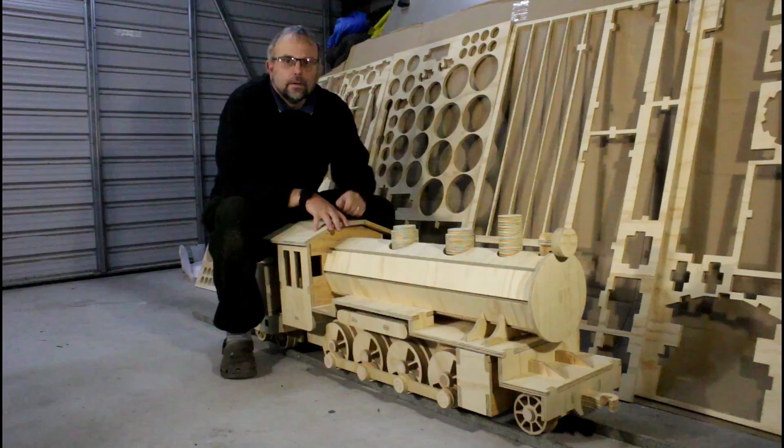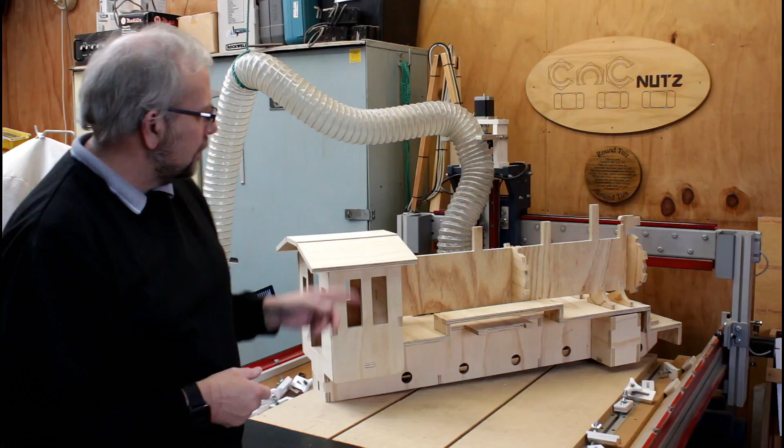This week's project is last week's project. We're going to continue cutting the remaining parts out for our model train here. I also want to take a bit of time to address some of the questions left in the comments section on the last video concerning the building of the train, and then I also want to show how I made the toolpaths for it and did that 180-degree flip of the material to make the most efficient use of my stock. So it's about time we cleared the table down here, put some stock on the table and started some cutting.

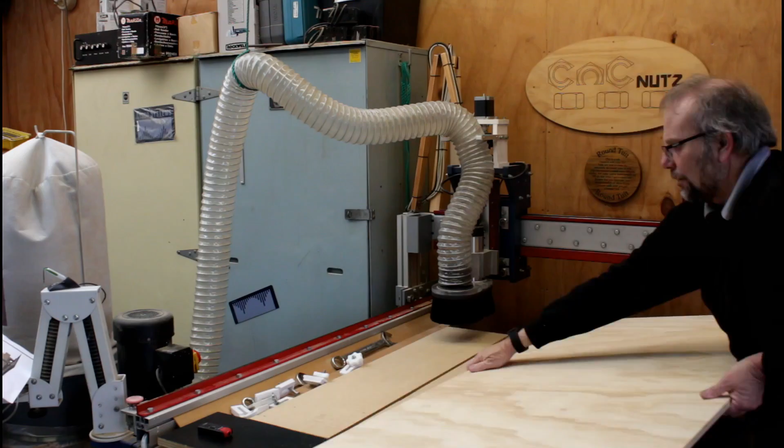So the most common question I've been asked so far on YouTube, Facebook and by email is what sort of cutter I'm using to get the good finish on my parts when cutting plywood. And here it is here. It's a 1/8 inch single flute down cutting spiral bit. When cutting plywood, it's important that you do use a down cutting spiral bit.

When these cutters run, they push the chips into the material at the same time slicing the fibers at the top of the plywood. Your usual up cutting spiral bit, what that does is it pulls the chips out of the slot, which is good for clearing the slot, but it also pulls the fibers up at the top of the plywood, which causes quite horrendous chip out at times.

Now here's a piece that I've cut, and this hasn't been sanded yet. This is it as it is off the table, and there's the smallest amount of furriness there if you want to be picky. The back of it looks perfectly fine as well. There's no chip out on the back of this material either.

So a down cutting spiral bit tends to push the fibers through the back of the plywood, but because it's sitting against the table, it doesn't cause that chip out that you normally see by using an upcutting bit at the top of the material.

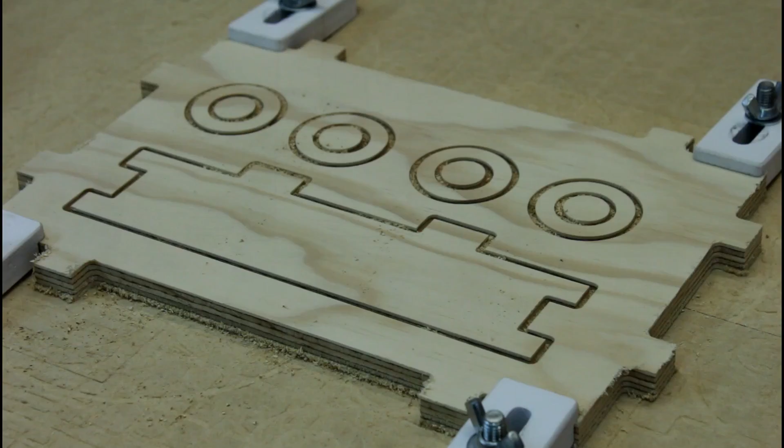Now I traced this down to the fact that the cutter had actually dulled over the course of my cutting. This isn't surprising given that I've been using this cutter for months before I even started this project. I did a test cut using a new cutter, and as you can see here, the results are much different. All these bits are nice and crisply cut at the top. They require no sanding. So it's not surprising that my older cutter had dulled a little bit. It's only to be expected.

So the other question is, why did I use a 1/8 inch bit rather than a quarter when cutting the plywood? A quarter would have cut this out so much quicker. And the answer is it's because of these slots here in the project. Because these have to fit like this into there, these corners here, if I used a large cutter, would have large radiuses on them. The upshot is they just wouldn't fit together very well.

By using the smallest possible cutter that's reasonable for the project, I get these sharper corners in here, and so everything's going to fit together better. I found 3mm to be the best option for me.

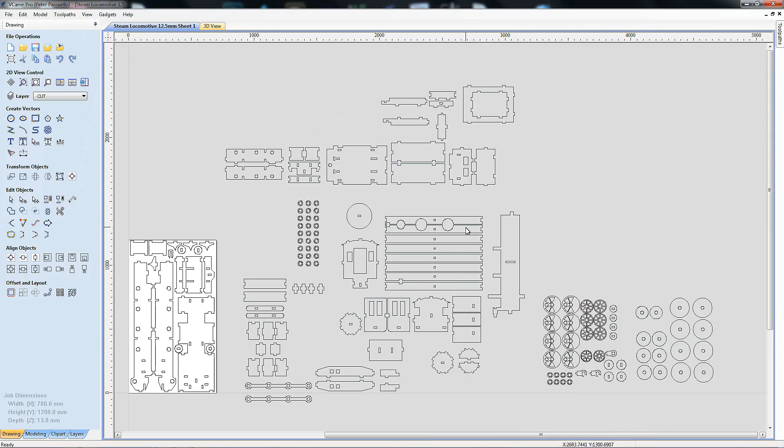So here are all the components I need to make my train. I've already scaled the drawing as I showed in last week's episode, and the first thing I need to do with the drawing is select all the components here and come over here to join open vectors and have a check.

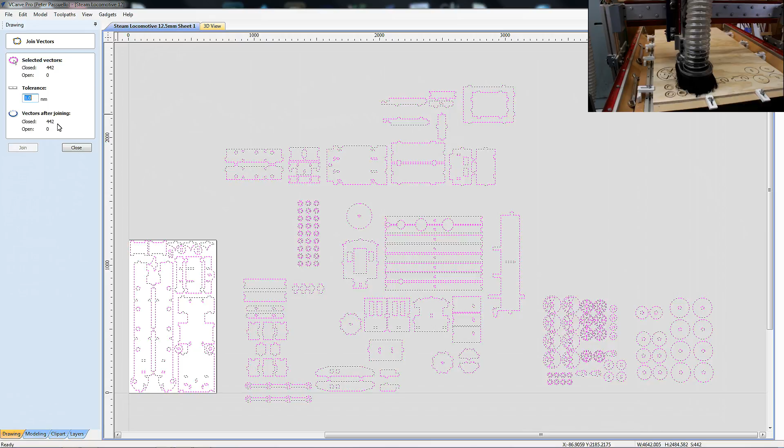I can see that I've got 442 closed vectors here, so I don't need to worry about that particular aspect of it. If they weren't closed, I would need to make sure that I went through and closed everything before I started. Whenever dealing with a file that you didn't create, it's always a good policy to go through and make sure that everything is closed.

I'm also going to select this section of components here, go Control C to copy them, Control V to paste a copy of them there, and then I'm just going to move them up here, because these components here are meant to be made with material that's twice as thick as the rest of them. Since I don't have any inch thick plywood, I'm simply going to cut 2 lots of them and glue them together. After all, that's what plywood is anyway.

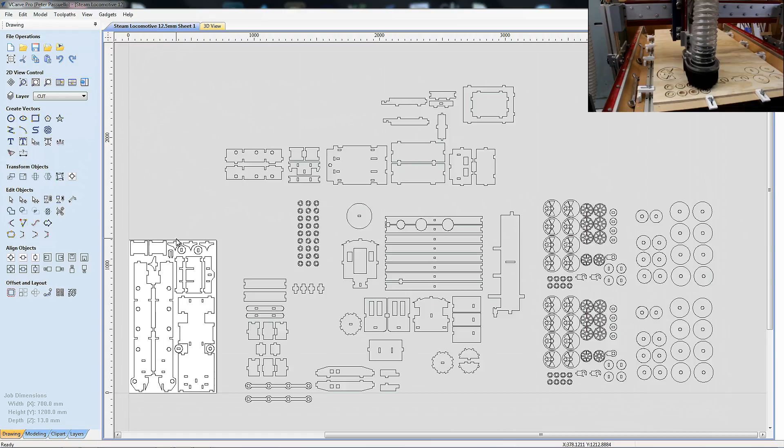Now the next thing I've got here is I've gone through and I've created my material size, 700 wide by 1200 long. So basically I'm just cutting my sheet 700 wide and keeping the full length of it, even though I cannot cut a piece of stock that big on my table. I can only cut to just over 1 meter in length. Now fortunately, this here, which is the longest piece in the puzzle, is only just a fraction over 1 meter in length, so I will be able to cut that in one piece. That saves me from having to tile this project.

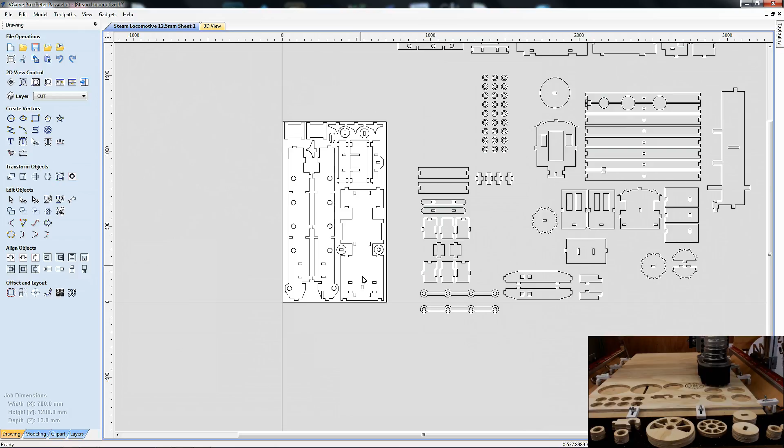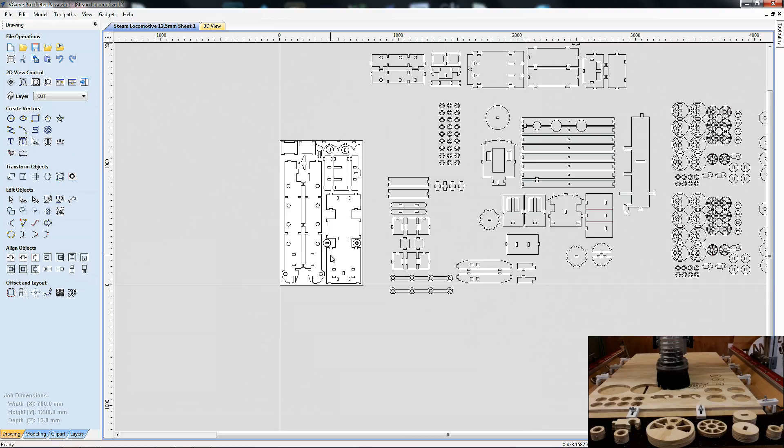Now next what I've done is I've gone through and I've put the pieces that I want onto my cutting area here. So I've taken these components here and simply dragged them off this area and onto my sheet, basically wherever I think they will fit. This way I get to cut the components I want. In this case, this is the start of the train, the bottom carriage setup, which I want those components first. Then I'll select some of the others and build on that. I could use VCarve Pro nesting, but I find that doesn't work very well in my opinion. So I prefer to do this sort of thing manually.

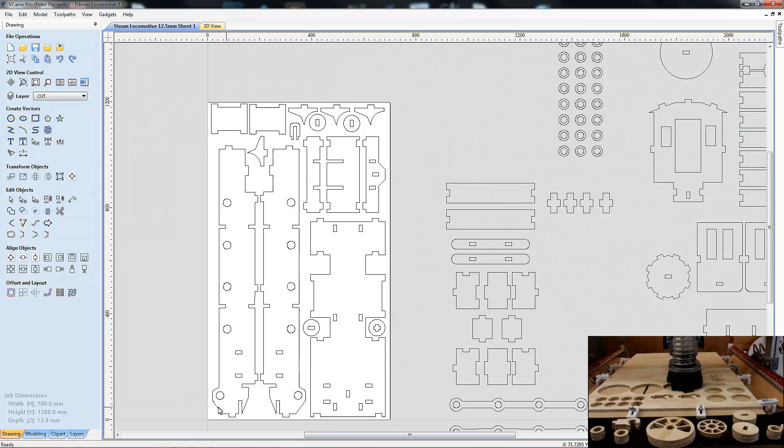Now having these components laid out here, you'll note that not only have I gone up to my just over 1 meter in length, I've gone beyond there and put more components onto this sheet. So if I reduce the size of my cutting area to the actual cutting area of my table, you can see I can cut these pieces here fine, but I can't cut these ones or these ones here. But for efficient usage of my stock, I'm going to lay out the board as if I could cut the whole thing in one pass. Now all I have to do is select the parts that I can cut, which will be these ones here.

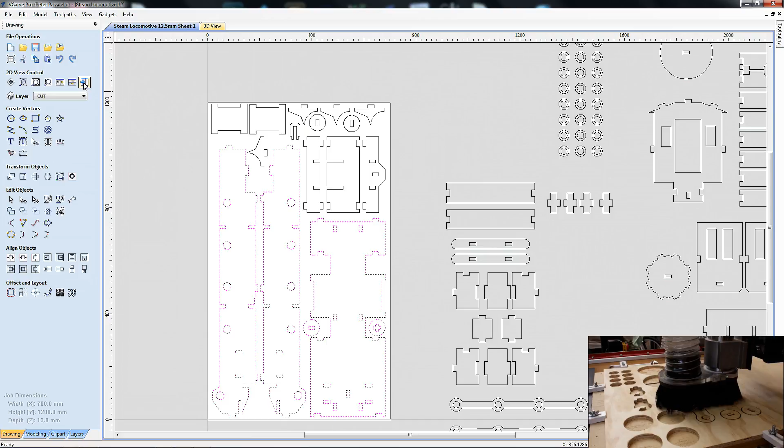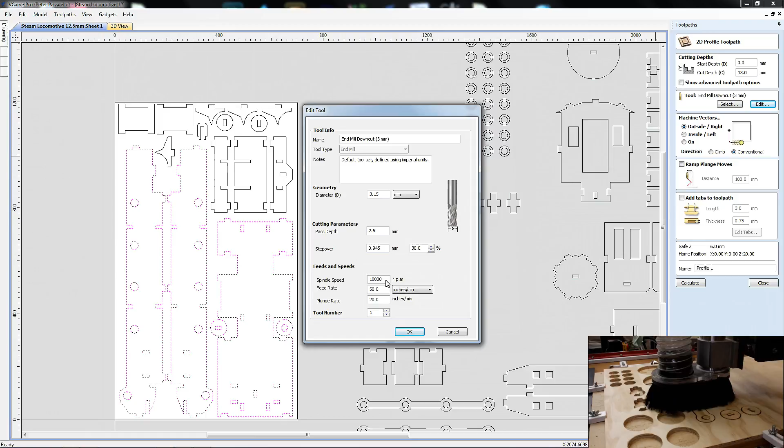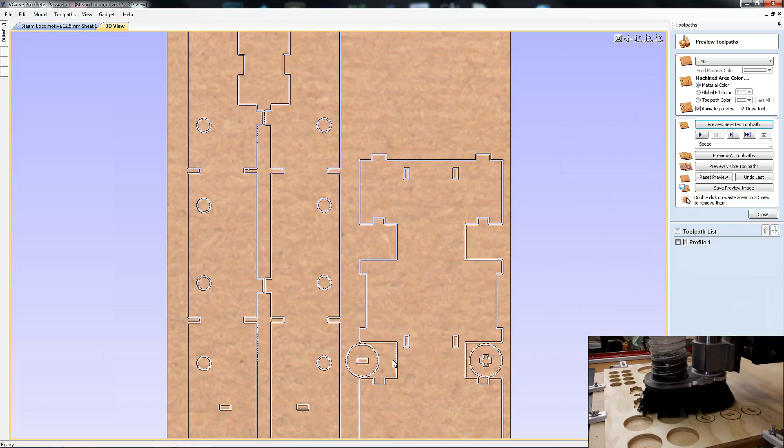I can now create a toolpath for them. This is basically just going to be a profile toolpath. I'll use my 3mm or 1/8 inch down cutting spiral bit. I'm going to set my feed rate to 50 inches a minute and my spindle speed at 10,000 RPM. I'll be taking a 2.5mm cut per pass. I will calculate this, and there it is. There's my toolpaths. Now these look a little bit close, but if I zoom in and go preview selected toolpath, you can see that I will not be interfering with the other components, so I'm fine there. Okay, that's the first toolpath done, and I'm going to call this sheet 1, cut 1.

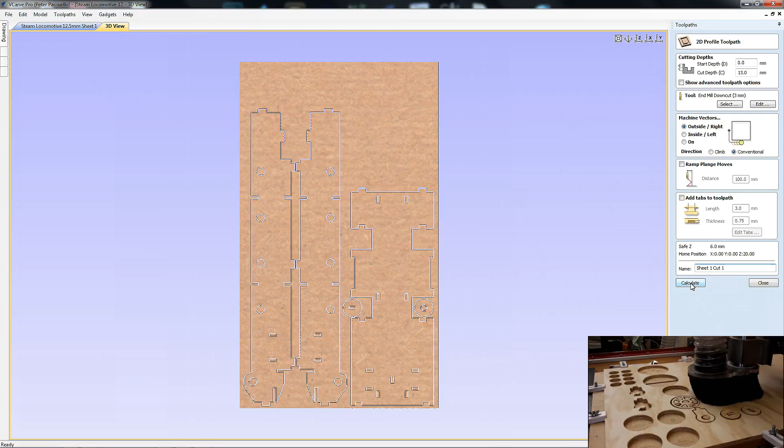Okay, so now I'm left with these parts here to cut, the ones that are missing from the sheet. So I'm just going to hold down the shift key and select the entire board here, and you'll see what that does is it selects the other pieces and unselects the original set that were selected. And I'm just going to go create a new toolpath, a new profile, down cutting spiral bit, outside pass. I'm going to call this sheet 1, cut 2. And I'll just calculate that for the second.

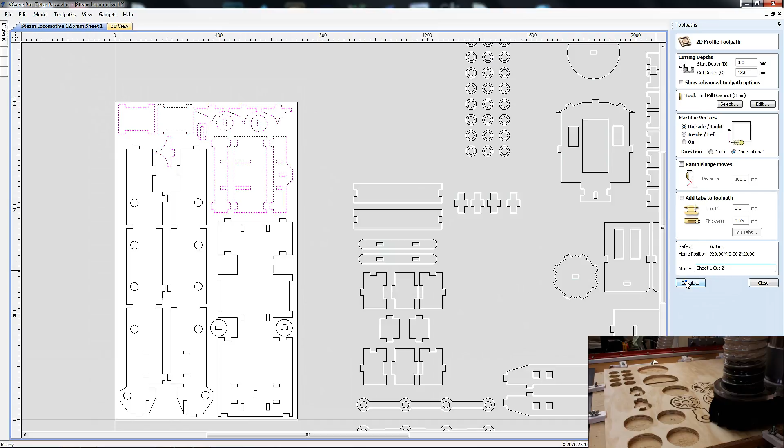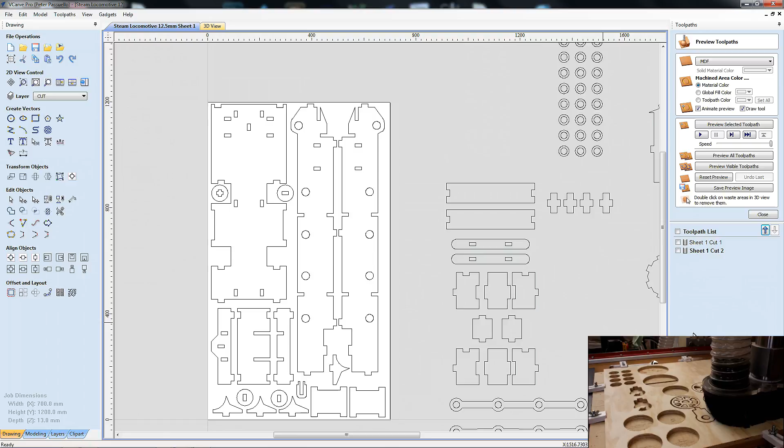But the problem is, that's not how I'm going to cut it. I'm going to select the whole thing here, come over here, and go rotate. I'm going to rotate it 180 degrees. I've done that. Come back over here to cut 2 and go calculate. Okay, you can see now it's going to cut these here at the bottom of the sheet. I'll just reset the preview. So you'll find that if you do enable the original cut 1, the two cuts overlap. So after I've done the first cut, I'm going to rotate the sheet 180 degrees, put it back on the table, and cut the second toolpath there.

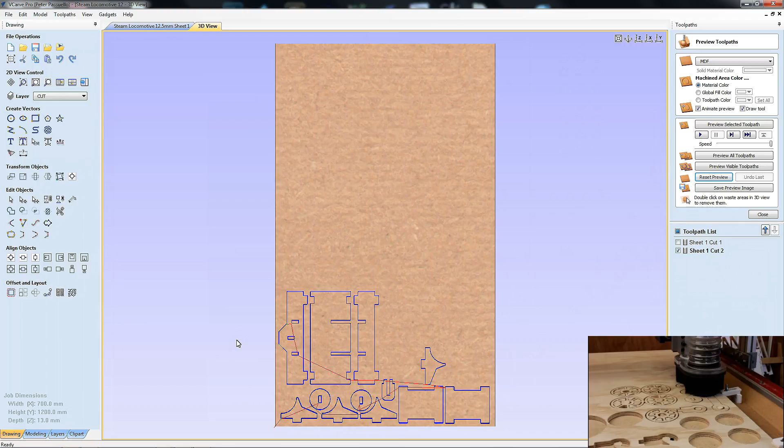This gives me full usage of my material, and I don't have to use a tiling toolpath. Again, it is important that you do a preview so that you can see if you have any overlapping cuts, and I don't, so I've got those spaced nicely.

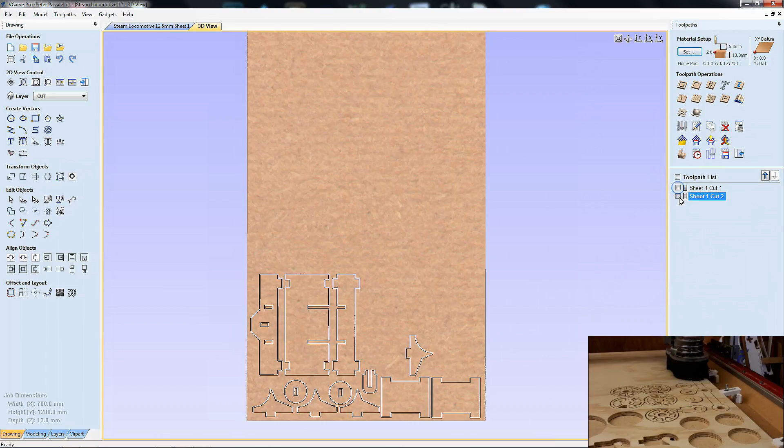It just simply becomes a matter of saving these two toolpaths, and you need to save them as separate toolpaths. So just go save toolpath, save the first one, then select the second one, save toolpath, save that as a completely separate file. And that's the secret to doing a 180 degree rotation of your stock to make the most efficient use of your material.

Well, there's no doubt about it. I think I must have been asleep when I made the toolpaths for these 3 wheels. Never mind, I'll cut them apart on the bandsaw.

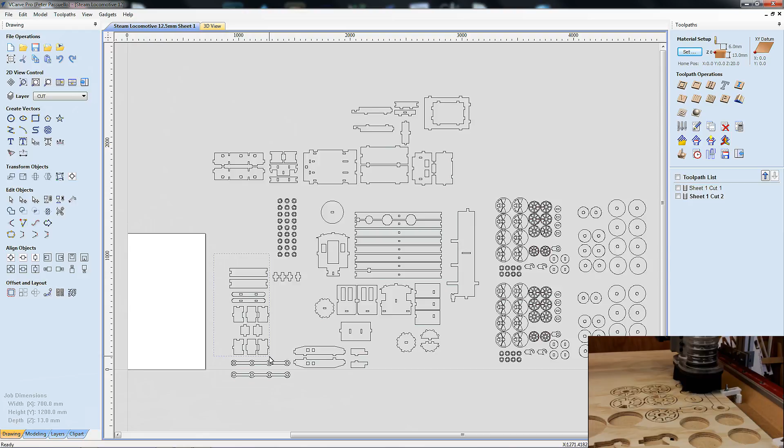Now, at the conclusion of making these files, save it. I saved it as sheet 1, and then come down here and delete these components. They've already been made. We can now start putting more components onto our board here and laying it out. And we'll be calling this sheet 2. Need to bring these components in, rotate them as necessary, and put them onto the sheet.

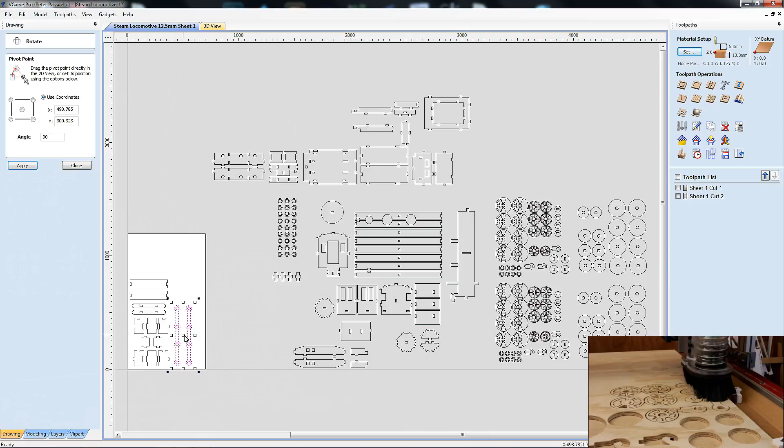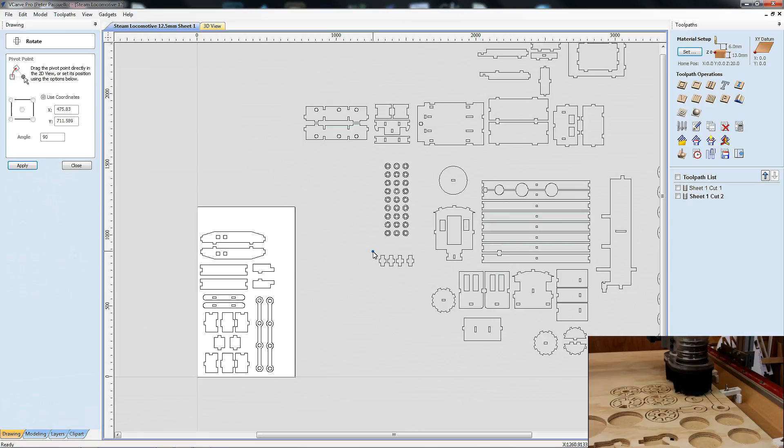Position them so that you get appropriate spacing between them. You don't want them too close to one another. Try and get your spacing right. You can pick and choose which parts you want so that you can get the parts you need to start building it as it's going. That way you start seeing a result as you're putting it together.

So just work your way through like this here, just selecting those parts. Just make sure you grab not only the outside but the internals of them as well. If they've got holes in them, make sure those holes don't move anywhere, and just take your time, lay them out. I'll just delete these here.

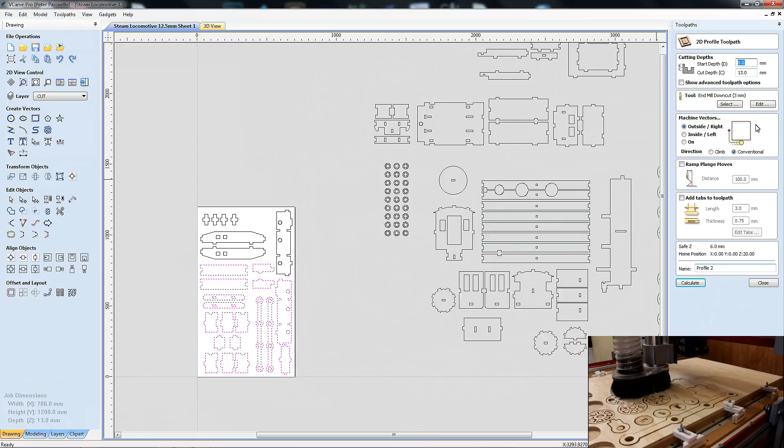And then once I've got the sheet pieces on the sheet here, then I can start making toolpaths for them. Now again, I'm only going to probably lay out these ones here first. I'll just go create a toolpath. There's my 3mm bit, or 1/8 inch bit I should say. I'm going to call this sheet 2, cut 1, calculate that.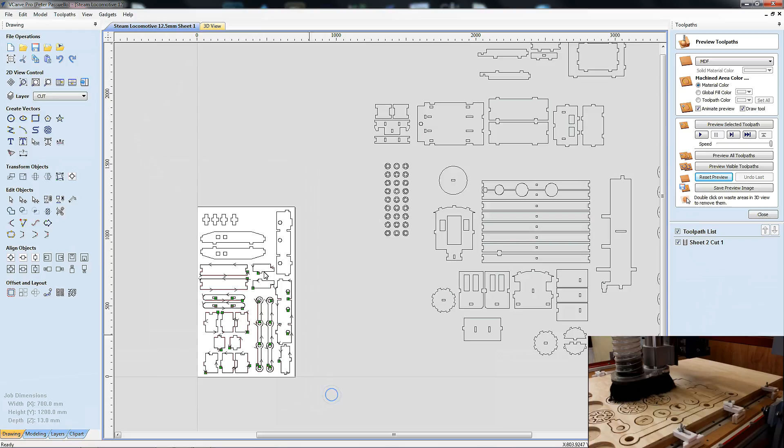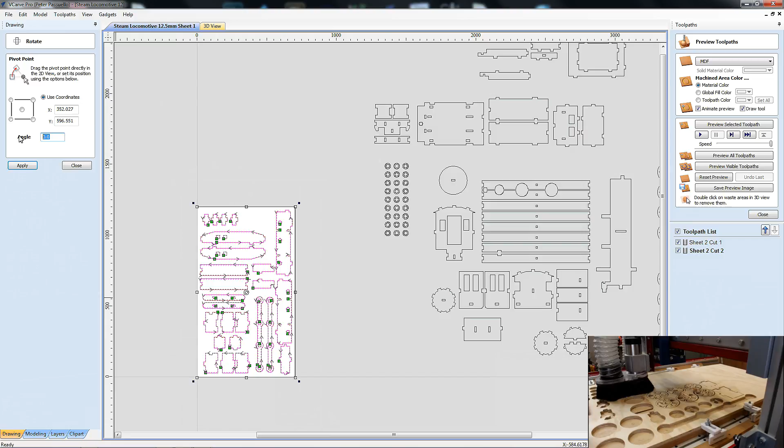So there's my first set of components. I'll just then hold down the shift key, grab it like so. That selects these ones here. I will create a new one, sheet 2, cut 2, calculate that, then come over here, just grab the lot, rotate it 180 degrees. I'll just unclick those there. Okay, now just grab sheet 2, cut 2, and just calculate that, and you're done.

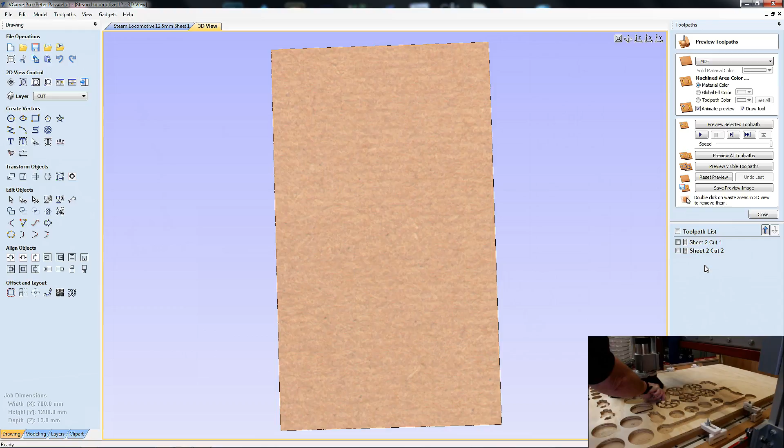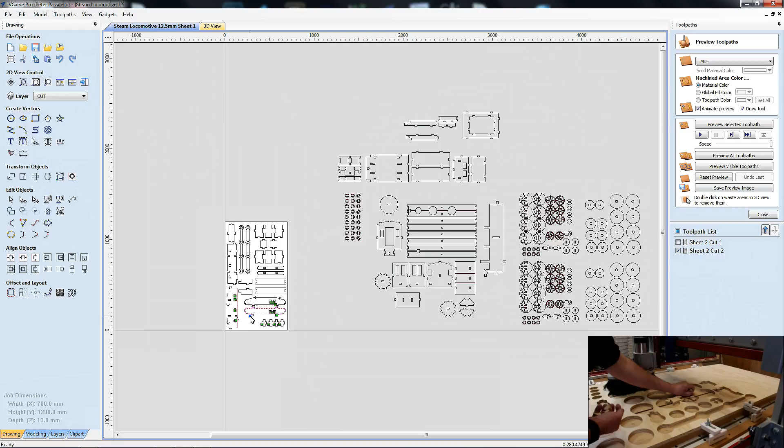Save each of these files individually, and once that's done, again, save this as sheet 2, delete these parts, and keep going until all these parts on this side here have been cut up, ready to go. Now, one of the things you'll notice is I'm not using holding tabs. There's a reason for that, and I'll go into that in my next episode. However, if you do wish to use holding tabs, and it's not a stupid idea, then simply put the holding tabs on here as necessary before saving your files.

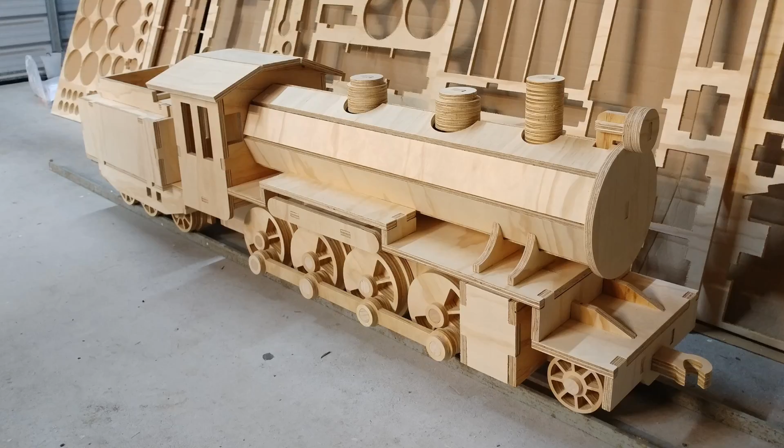Well, there we have it, the finished train, and isn't it a beauty? 1.7 metres long, that's just over 5.5 feet. And I'm really pleased to see that the carriage here at the back is actually articulated. It's held to the train via a pin linkage, so that's going to make it easier to connect and disconnect for storage, as well as give it the best chance of being able to be motorised to run around my brother's front yard. Now, I won't be following up on that particular part of the project. I'll leave him to sort out the finer details on that. But if we get it working, I'll put a video up of the train running on a track.

Well, that basically rounds up this week's project. I hope you've enjoyed it as much as I have. I was really surprised how well this thing went together, how easy it was to make, and how much I ultimately ended up enjoying it. And I'm really pleased with the final result here. It looks beauty.